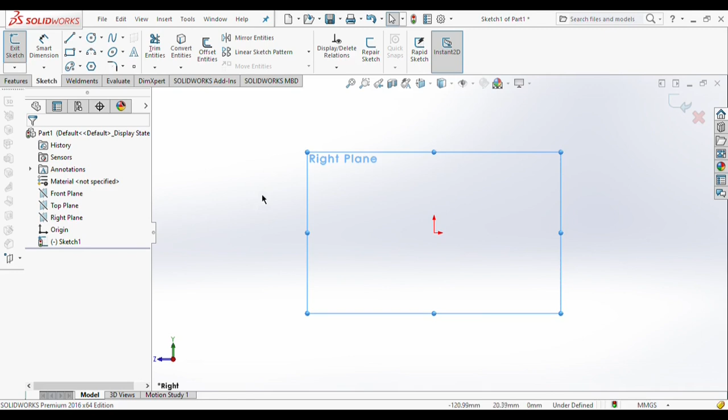So for that, first select the right plane, normal to, and then take a center line, draw it from the origin. Now select the line, draw the outer geometry of the socket, then draw the inner geometry of the socket. Now give the dimensions to it.

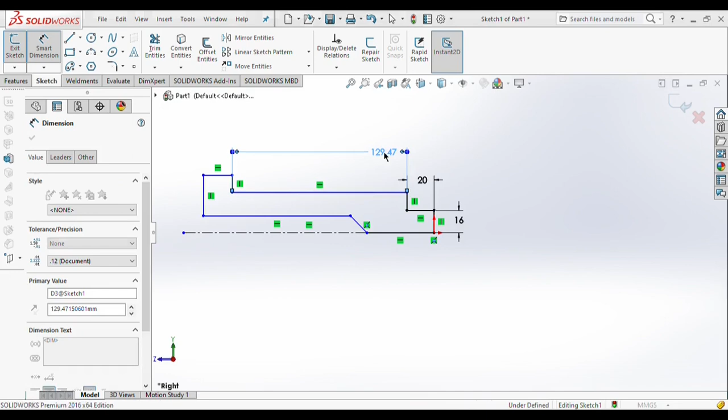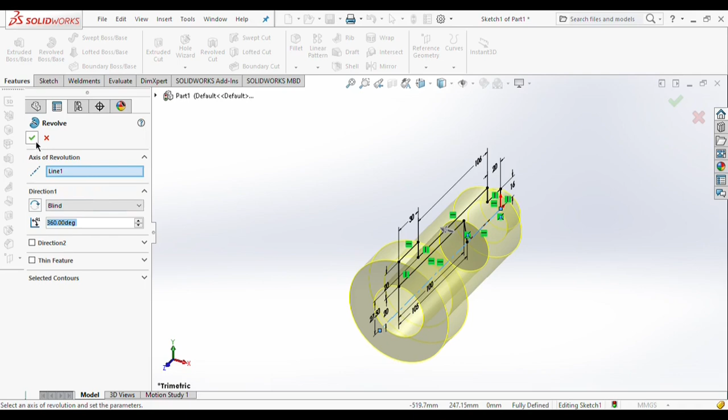So now you can see our sketch got fully defined. Now go to features and Revolve boss, and you can see the preview is shown to us, and click on OK. So you can see our socket outer body generated.

Now we want to give the slot for the Cotter pin. Click on right plane, normal to, then draw the center line, then draw the line. Give the smart dimensions as 50 mm. Give the distance between this surface and the edge as 8 mm.

Now we want to make the taper slot. For that, draw the geometry. As we know, the taper slot is of 1:30. So we convert that ratio in degree.

Click on coincident, and as I said, we have converted that ratio in degree. So we got the answer as 3.80. So click 3.8. And now just complete this sketch.

Now go to the features option, extrude cut, and select the mid plane and give the thickness as 10 mm. So you can see the slot is generated over here. So now save this part as a socket, and we move to the spigot.

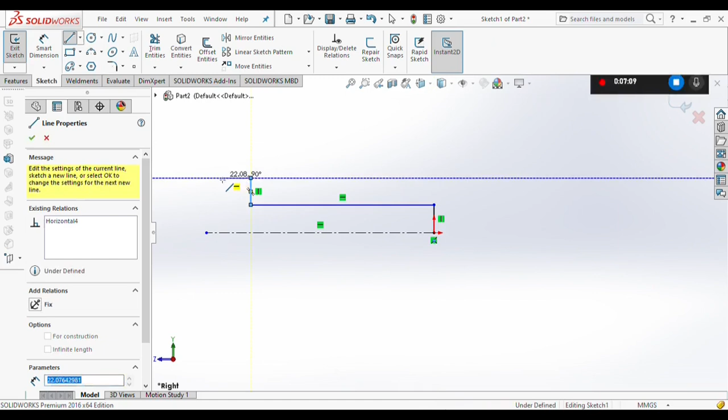Now we are going to design the spigot part. So for that, use the same process. Select the right plane, then draw a center line and draw the outer sketch of spigot. Now give the dimensions according to your design.

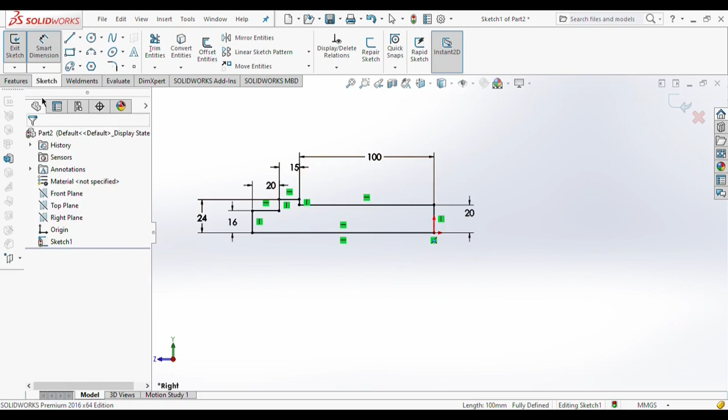So you can see our sketch got fully defined. So simply go to the features option, Revolve boss, and you can see the preview is generated over here. So click on OK. Now you can see the outer body of spigot is generated.

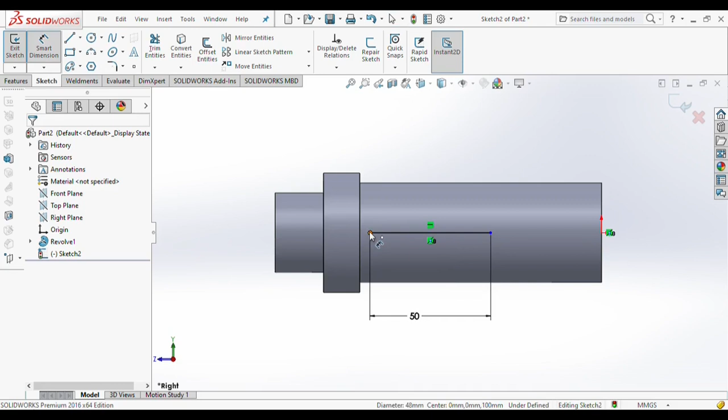So now we have to make the slot for the Cotter pin. So select again the right plane, normal to, draw a line from the center, give the dimensions as 50 mm, and give the distance between these two edges as 24. Now simply follow the process that we follow for the socket.

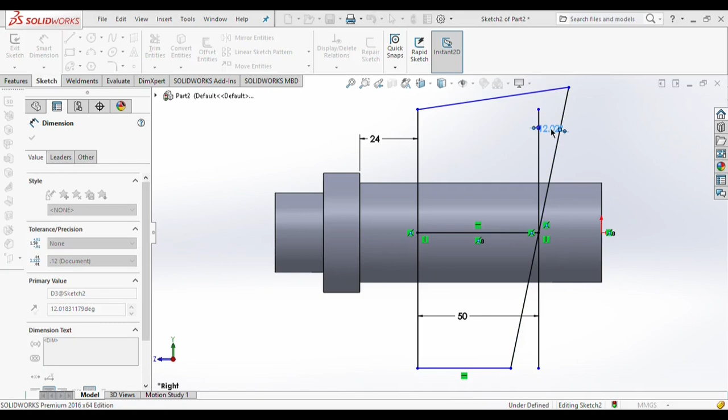Give the angle as 3.8 degree and go to the features and extrude cut from mid plane and select both this sketch. So you can see the slot is also generated over here.

So at last, now we have to design the Cotter pin. So save this part as a spigot and move to the Cotter pin.

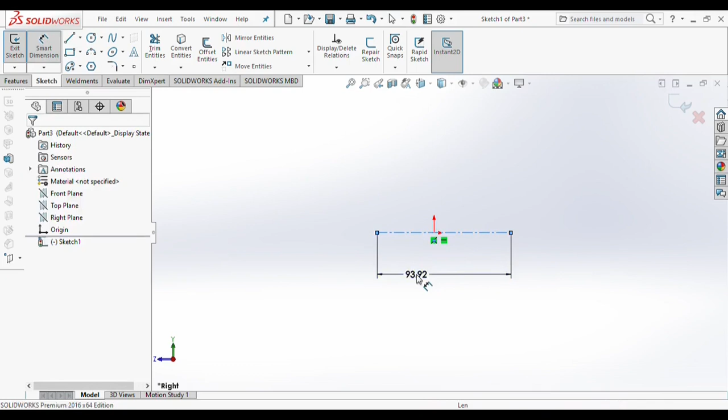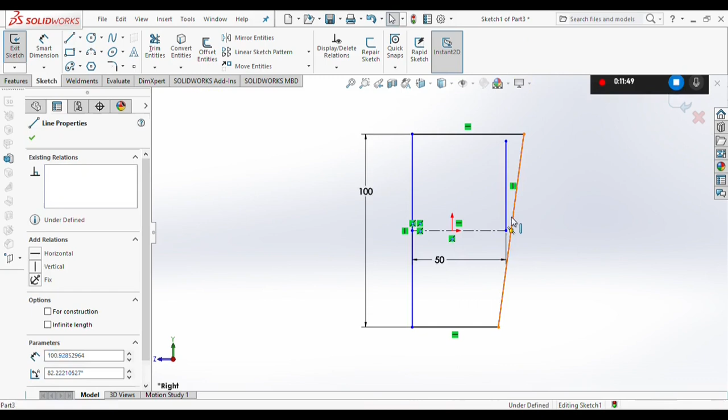So now for designing the Cotter pin, select the right plane, then draw the thickness as 50, give the length as 100 mm. Make this as coincident, give the smart dimensions as 100 mm, make this center and this center as coincident. Make this line and this point as coincident, and give the angle as 3.8 degrees.

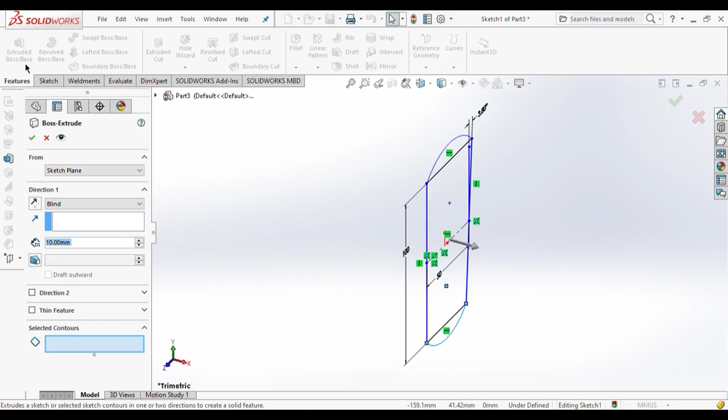And draw the arcs, and then simply extrude boss to the thickness as 10 mm from the mid plane. So here our Cotter pin is also designed.

So now we move to the assembly part of this Cotter joint. So for that, save this as a Cotter pin and move to the assembly. So click on the new option, then assembly, and then OK.

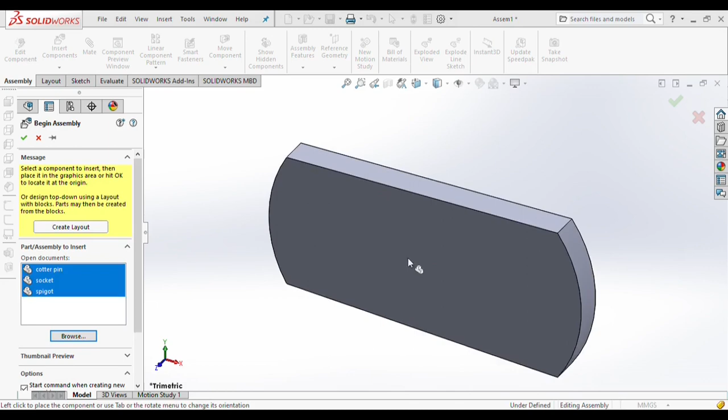Then go to the insert option, browse and select our parts. All the parts are inserted in the interface, so make according to your purpose, make the parts as fix and float. Right click and here you get the option as a fix or the float. I will fix this socket and make other as a float.

So you can see here the option of mate. What is the mate actually? It is similar to the relations that we give in the sketch part. So in this mate option we give the relation between the two bodies.

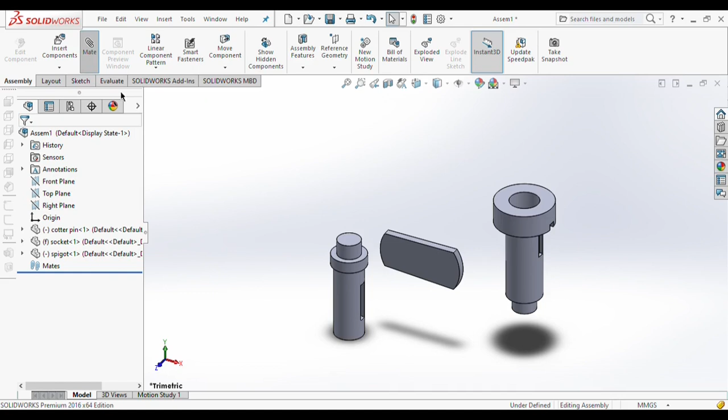So click on the mate option and give the relations between these two internal diameters as coincident and click on OK. Now click on this surface and this surface, both get mate automatically. Click on this surface and this surface, so you can see both get mate.

So here there are different options of standard mate as coincident, parallel, perpendicular, tangent, concentric. SolidWorks select automatically according to our purpose. If you want to change, you can change it from here.

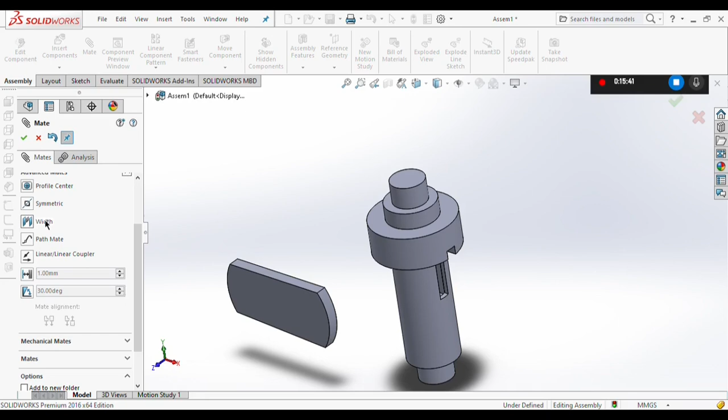Then there are the advanced mate as profile center, symmetric, width, path mate. So we are going to use this width mate. So click on width, select the width of this Cotter pin, then select the width of this socket slot, click on OK. Now select this surface and the inside surface.

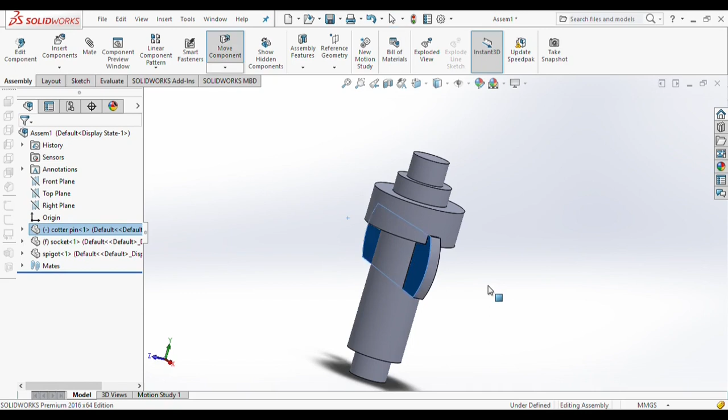So you can see our Cotter joint is ready. You can see there are many options. Mostly we use the insert components and mate options. There are options like linear component patterns, then move components, reference geometry, bill of material, exploded view.

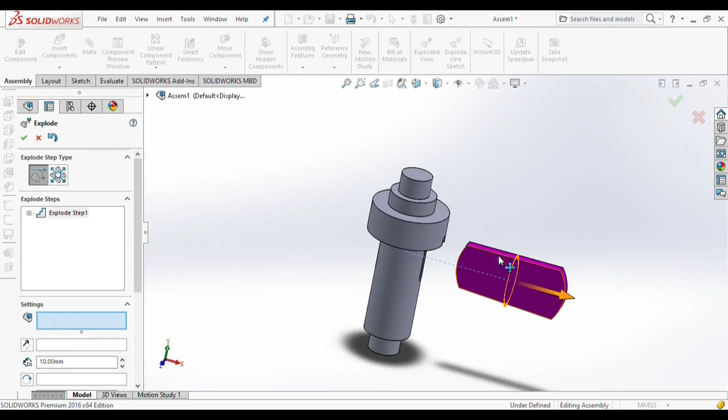We are going to use this option as exploded view. Select this part, move to this distance, then select this spigot, move upward, select this socket and click on OK. Then go to the assembly, right click, then click on collapse.

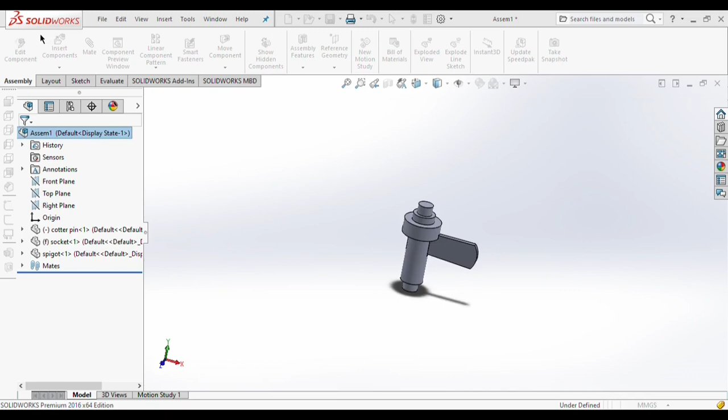Then again go to assembly, right click and go to animate explode, and you can see the animations. You can play it again. This was the use of exploded view.

So this way we have completed the Cotter joint and the basic of assembly.